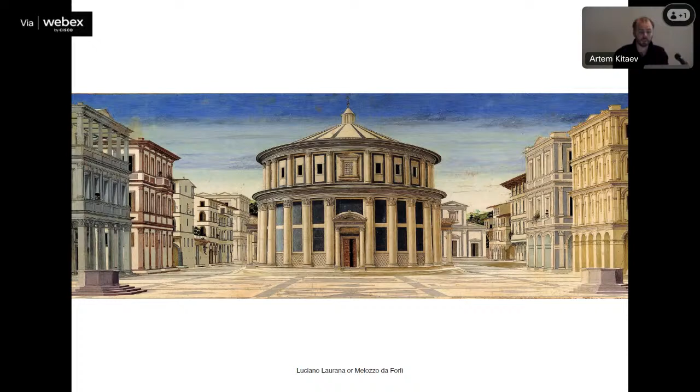Today's discussion, I would like to start with the image, our image of the future. This painting of an ideal city brings us, or reveals for us, understanding of the Renaissance understanding of an ideal city. So we could see here beautiful perspectives, square colonnades and windows carefully assembled in a beautiful ensemble. One beautiful project, and the only thing which we miss here is understanding of the place, or history of the place, what actually was here before, and it's difficult to trace the history of development, of achievement of such a beautiful ensemble.

Later in this engraving, offering us another vision of the future, we could see again an inspiring atmosphere of technology and architecture, where beautiful facades align in one ensemble. And again, we're lacking to detect the development of the site and what was here before, like it was installed at once as one project.

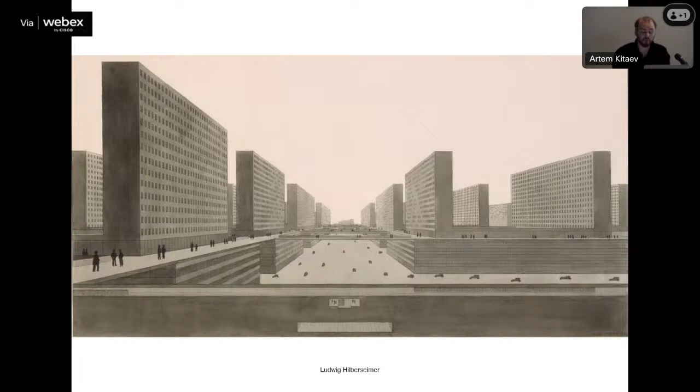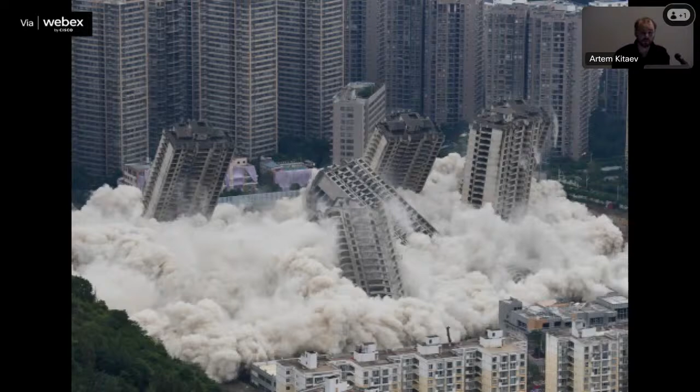Or the other project of the future, which also proposes strong control and a great understanding of these future plans, and what happens when such a project, such an idea, such a concept doesn't fulfill 100% of our requirements. We have only one, the most efficient solution to free up the space for the new bright future: demolition and new construction.

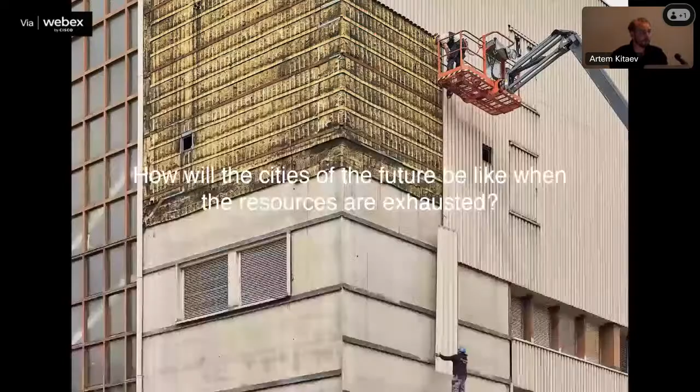So the current organization of the construction industry is extraction, construction, and demolition. Very linear, very efficient, up to a certain limit. But what do we do when all the resources are exhausted, or most of them are exhausted, or they're just not affordable anymore? What should be the role of the architect in such a configuration?

And here, probably, it's the moment when we can try to question the role of the architect, or imagine a transformation of the architect from chief builder to chief curator.

Architect: archi from the main, or chief, and tect, builder or constructor. So it's the person who creates spaces, designs and builds new spaces.

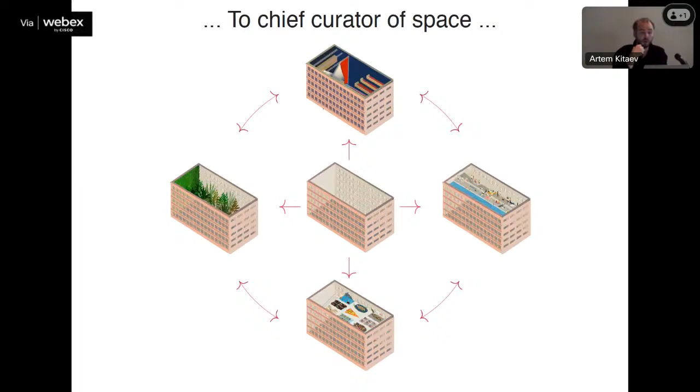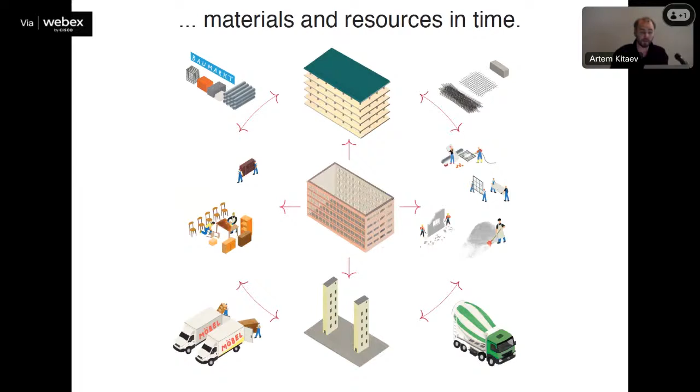But probably it's time to see our role more as a curator of spaces, to find the possibility to adapt existing spaces and structures to new needs and requirements, but not only spaces, as well as materials and resources. Any construction, any demolition is every time a great resource for new construction, and we are not allowed to waste these resources. The careful evaluation of the values of existing structures, of the values of the resources, of their potential in the cycle of construction is our absolute responsibility, something we don't have the right anymore to avoid, to skip, or to give to other occupations or experts.

Assembly should be looped, should be cycled with disassembly through reuse and repair. It should be one inevitable circle with a circular use of resources, where each action, each new facility continues the process of disassembly. So each old becomes new, and each new should bear in mind that at a certain moment it should become old and again be reused. So we have to implement these processes of future disassembly, and design for disassembly, in a way.

I would like to illustrate these thoughts with several projects. The first project which we have done, which I will show today, is called New Order. We did it for the Swiss Art and Design Awards in 2017. In this project we tried to work with materials which normally get unmentioned by architects, or even ignored by architects, but which would inevitably appear in architectural design and urban space. I'm speaking here about regulation cones, anti-bird spikes, different protections.

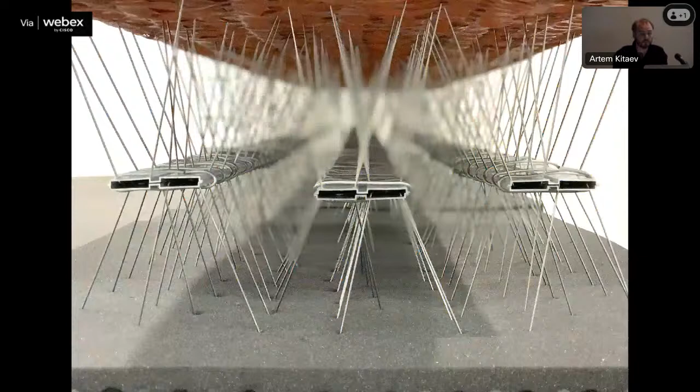To conceptualize it, these are materials and elements which protect buildings from people or animals, or protect people from being hurt by buildings and structures. We tried to see how we could work with this material unconventionally, to rethink the way they could be used — for example, to use non-structural materials as an element of the structure — trying to understand where the potential lies in using them in a very new or unexpected, or even probably wrong, way, but also trying to discover a beauty of sharp and soft, bright and gray.

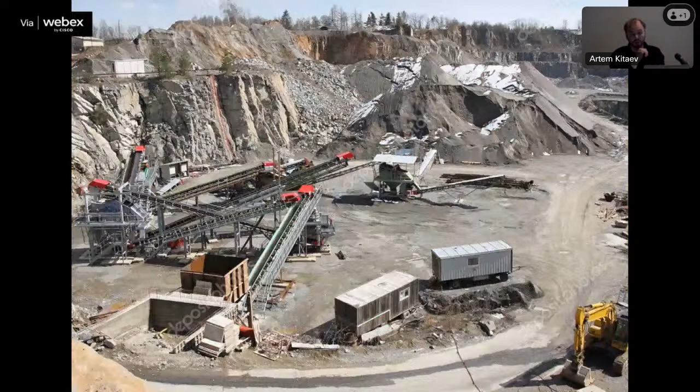The next project, called Permanently Temporary, was a competition for a pavilion in Barcelona, which we won together with the Parabase architectural office. This project is dedicated to materials excluded from the construction cycle. And again, any construction is based on the extraction of natural, unrenewable resources.

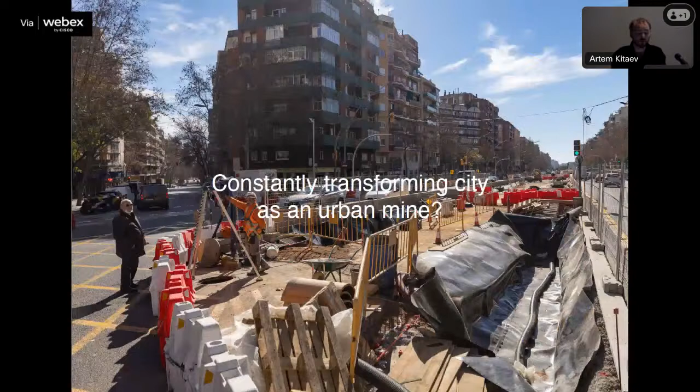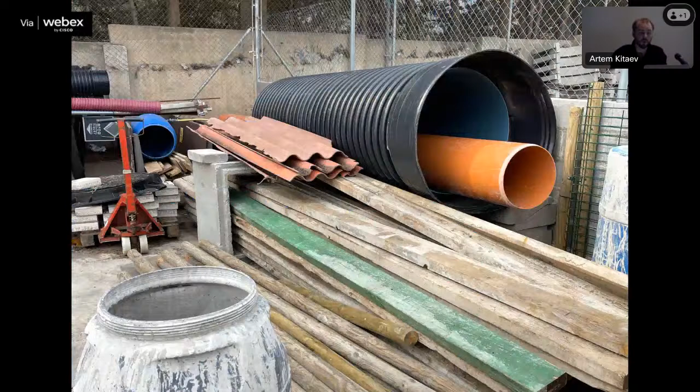And we thought, what if we look a bit closer at the materials which are already available to us? Any contemporary city constantly undergoes transformation, which releases a lot of spare materials that then just happen to be stored or left around the city, or placed temporarily, or awaiting dilapidation or decay. It was very interesting to us how some materials, which we don't even have a strategy to reuse, could be brought back into the cycle of construction and used for the creation of facilities.

Sometimes they get stuck behind the columns or stored under the sheds, and they are absolutely diverse in scale and geometry. We were granted access to different storages in Barcelona, where we could find pretty much everything, starting from heritage sculptures of particular beauty.

For example, here we could see doors of Sagrada Familia just stored somewhere in one of these garages in the outskirts, or elements of Enrique Miralles' Stadium just placed in the field behind the sports grounds.

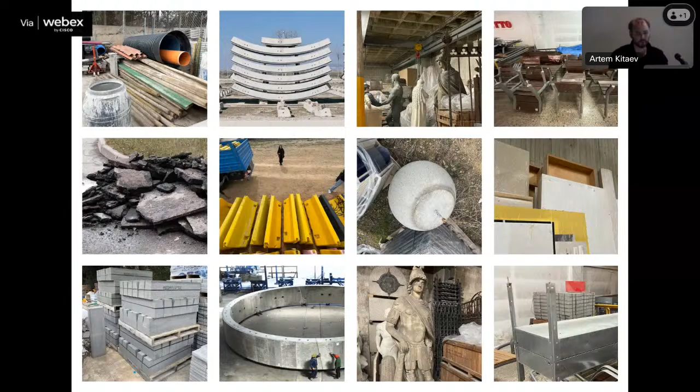And when we speak about reuse, it doesn't mean using everything you have. Reuse is not a patchwork of all accessible materials. Reuse is a careful selection and assembly of accessible, available materials in one composition.

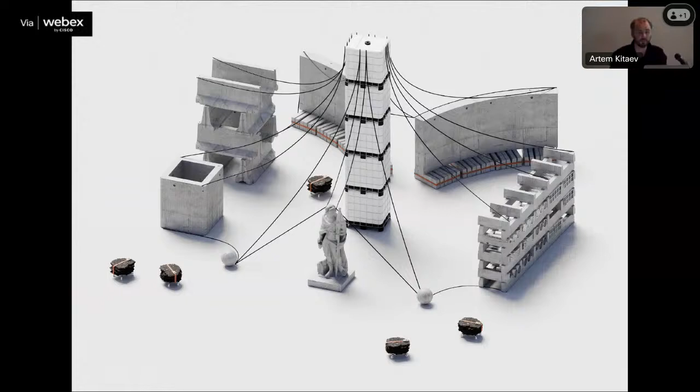So we decided to select mineral materials for the temporary installation, which normally are not used for this, carefully placed them on the side and covered them with debris netting to unite them in one form.

And that's how the pavilion opens - well, it's not doors, it's actually fixed tunnel elements - but it indicates the main entrance, which is supposed to invite visitors inside.

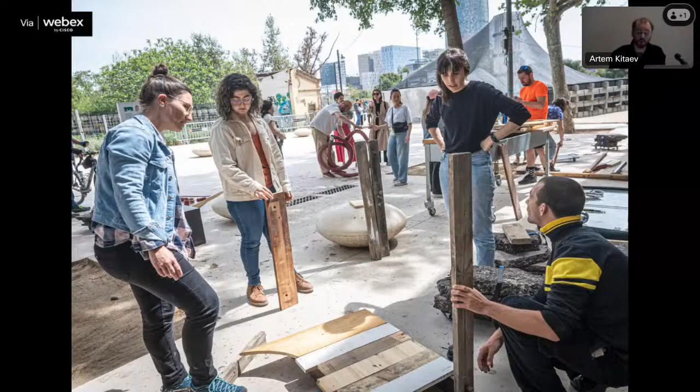And from the other side, we have invited the other main character of the pavilion. It was important to us to create a space which would allow a dialogue through exhibitions and different workshops about the meaning of materials in the contemporary organization of construction.

And we spoke not only about construction materials, but also about heritage. What is the role of heritage in construction? Is it just untouchable monuments, or could we see some of them as spolia, being again integrated into the cycle of construction and bringing us not only visual pleasure, but also probably some practical meaning to the structures?

So the pavilion happened to be quite an active public space over the day and in the evening and over the night for people, not only keeping twinkling company with Agbar Tower by Jean Nouvel.

And when we were building this pavilion, it was very important to us to pose the main question about the temporality of permanence - how temporary this pavilion should be, or how permanent a temporary pavilion should be.

And this combination of temporary and permanent in the pavilion, we also decided to unpack through the method of construction.

So we built this pavilion in such a way that we would be able to disassemble it without damaging any of the materials, because all the materials were rented and we had to pay a deposit, and we wanted to get this deposit back. So we were very careful about the materials.

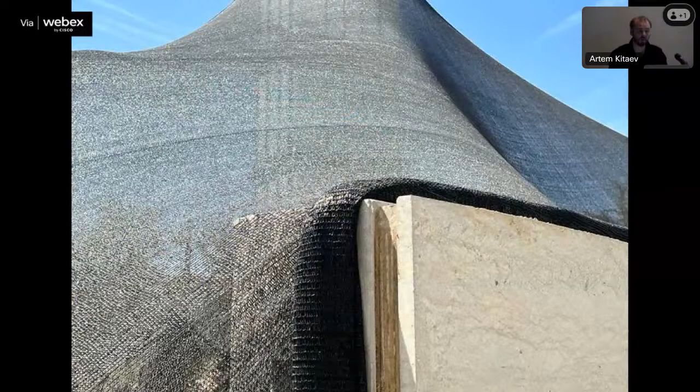For example, even the debris netting, we decided to roll - and by rolling the material, you reveal an additional quality of the material, so it becomes strong. And actually, we didn't use any straps. We just pulled the same fabric all around the stacked elements.

And we fixed all the other elements also in such a way that we would be able to disassemble them without damaging any of the materials.

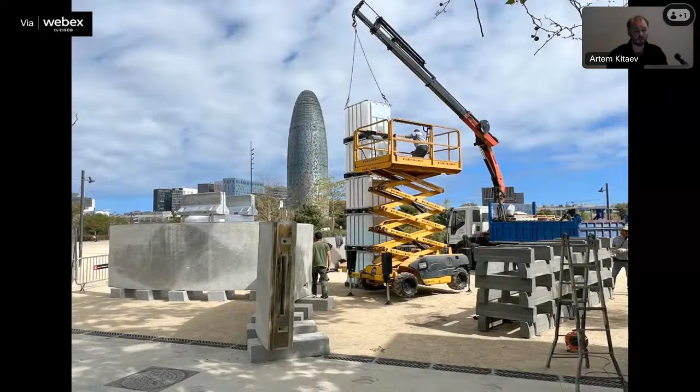And even the seats were made out of these concrete blocks, also in a way that we wouldn't be damaging the concrete blocks. And afterwards, the material was disassembled and returned to the storages, and we made all the materials available again for construction and further reuse.

The other project, of a different scale but dedicated to the same question, is called Stadthotel Triemli. It was a competition in Zurich to reuse 3 identical dormitory buildings, which we won.

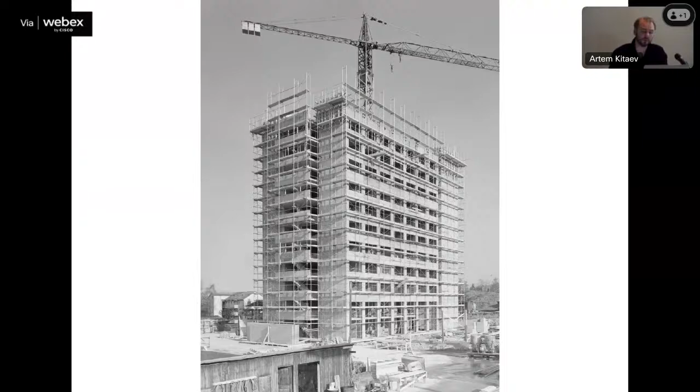So these 3 identical buildings were built in 1967. Back then, it used a quite progressive technology of prefabricated structural walls, which allowed the building to be assembled quite fast, but which also created rather efficient and rather dense cells within the building.

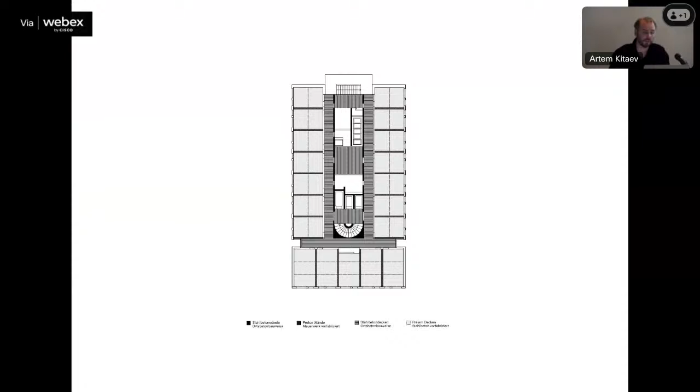But on the other hand, this type of organizational structure of the building didn't allow for easy adaptation or transformation. Interestingly, because of that, the City of Zurich decided to demolish the building, even though it was in perfectly good condition. You could see the perfect concrete and these enfilades of rooms - everything clear and ready to move in, but it didn't comply with current regulations.

To us it was interesting to showcase in these 3 identical buildings, different scenarios, what we can do with such existing structures to adapt them to new requirements. So we came up with a concept, hardware, software, and architecture, meaning to divide architecture, to design architecture for change, dividing it from the very beginning into 2 parts.

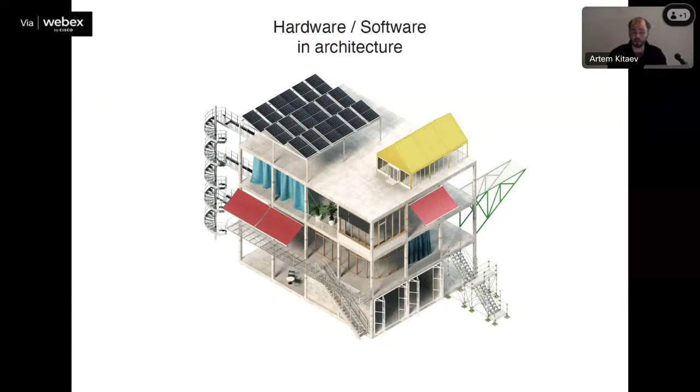Hardware is a flexible, open, load-bearing generally structure, and the software is this adjustable infill which allows us to adapt the structure to new programs and new requirements. So the first step we took was bringing this structure to a kind of universal open mode, which would allow the integration of different programs.

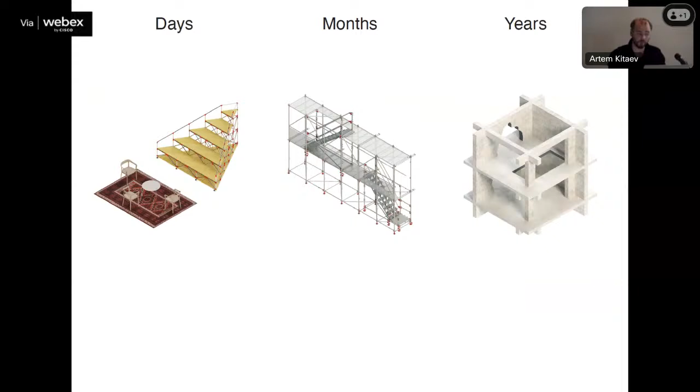Then we introduced 3 scenarios for each of the towers. The days, for example, for a short-term stay like hotels, where all adjustment would be done by furniture only. Months, it's like seasonal living or student accommodation, where different temporary structures could enhance the structure and provide additional amenities. And years, where we would intervene with the load-bearing structure itself, for long-term stay, for housing for example.

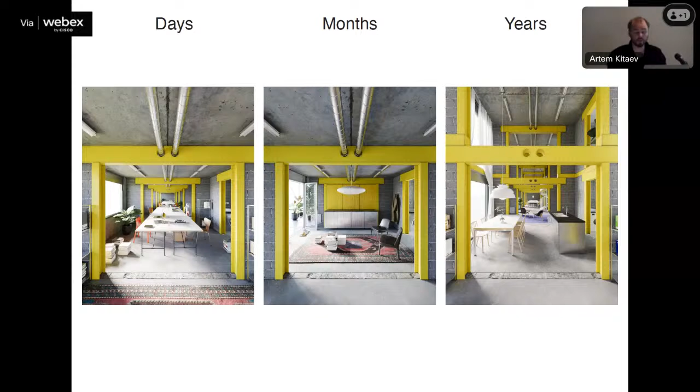So here you could see these 3 scenarios: furniture, temporary structures from the outside, and transformation of load-bearing structure. That's how these scenarios look. On the left, different layouts of furniture, new amenities on the outside for the month scenario delivered by the temporary structure, and years when we open up the existing load-bearing structure, enriching the diversity of spatial conditions.

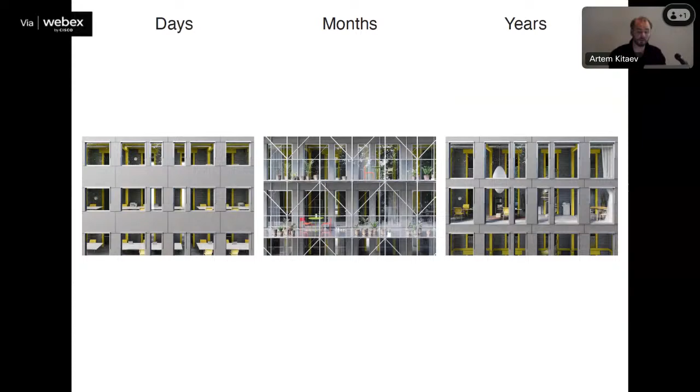And of course, all three types of interventions had their own difference and different expression on the facade. Here we could see three scenarios: years, months, and days, which offer three additional strategies to work with such structures across different extents of time.

Crevasse. It is the project, the competition for renovation of the Contemporary Art Museum in Geneva, which we have done together with Jan De Vylder and Inge Vinck Architects.

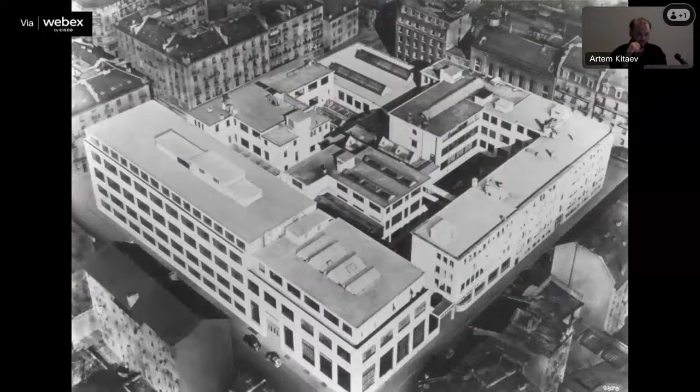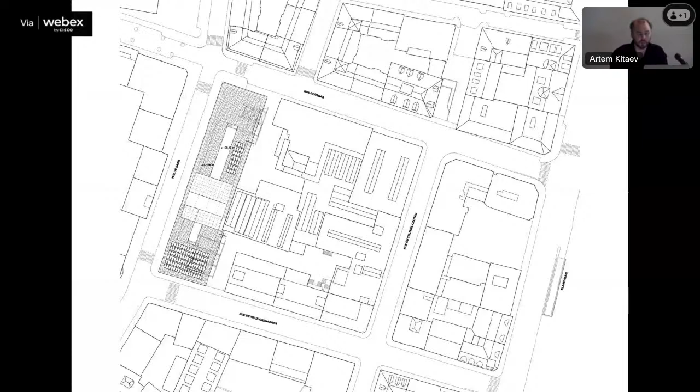This industrial building, built at the end of the 1920s, actually consists of two parts, built with a difference of 5 years, and it now hosts two institutions. The building occupies the western side of the city block, and that's how it looks now.

What's also interesting is that it has a back facade and a connection with the courtyard, which also could be, or has the potential to be, used as a public space.

What is interesting about these two institutions is they technically don't share much more in common than the building itself. More than that, they both lack an identity within this building. It's not even clear where the main entrance is or how to enter either institution. So that was one of the main challenges of the competition.

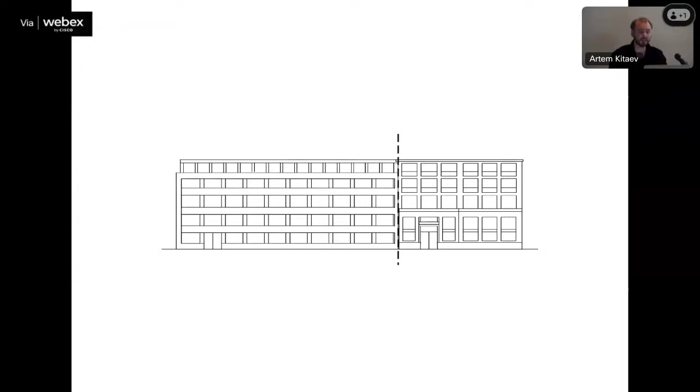To us it was interesting to find this joint, this place where we could reveal, or intervene in order to reveal, this identity. Sometimes improving a situation doesn't mean to build new, but means to extract.

Similar to the actions of Lucio Fontana, who released the energy of the canvas by cutting it, or the actions of Gordon Matta-Clark, who separated buildings, we proposed to introduce such a crevasse, a crack, which divides the glacier into parts.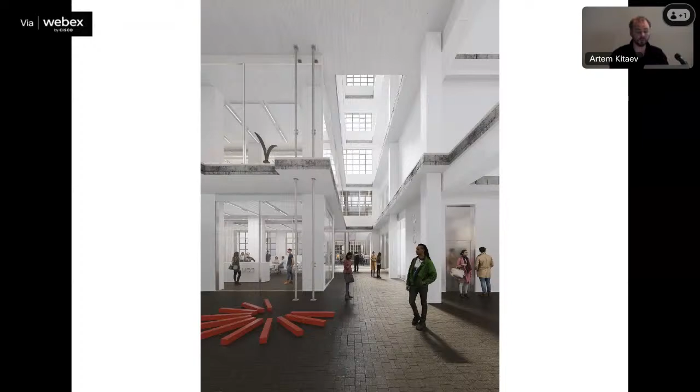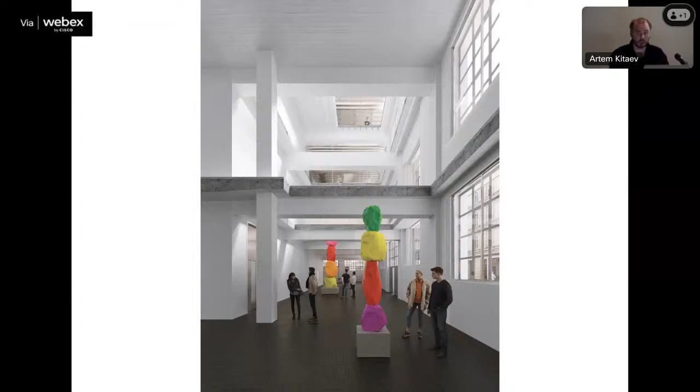So we decided to divide this building, to unite it by division. We introduced a big opening which separated the two institutions, but connects them, offering a visual connection and building up identity, as well as offering a space for interaction and communication, for exhibitions, and a connection to the backyard public space, enriching the spatial conditions of the space.

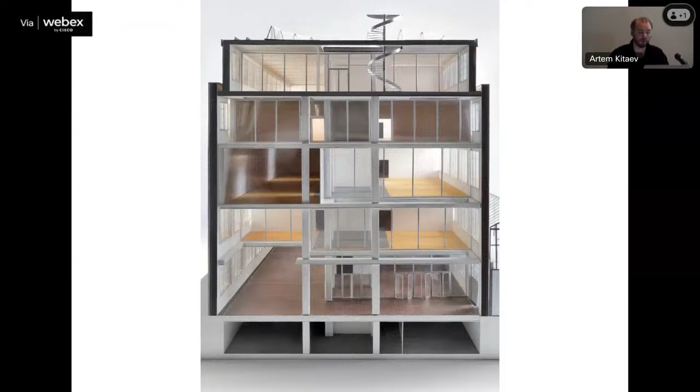So this combination of tall and narrow spaces has enriched the overall offer of spaces for the two institutions.

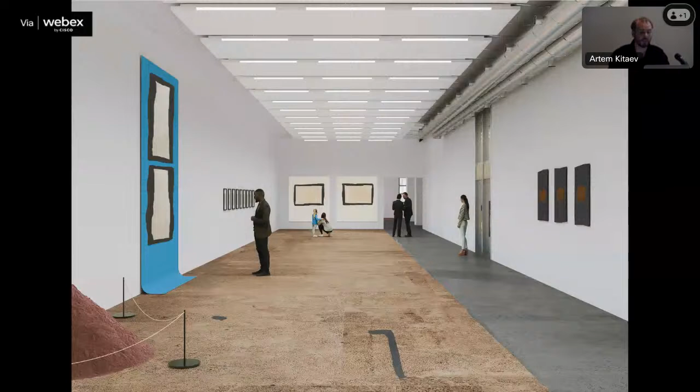To us it was interesting to see how in this simple structure we could find room to express this diversity, and we tried to preserve as much as possible of the existing structure. For example, here you could see even the floor, this industrial floor with different stains, is also supposed to be preserved in the white cube gallery.

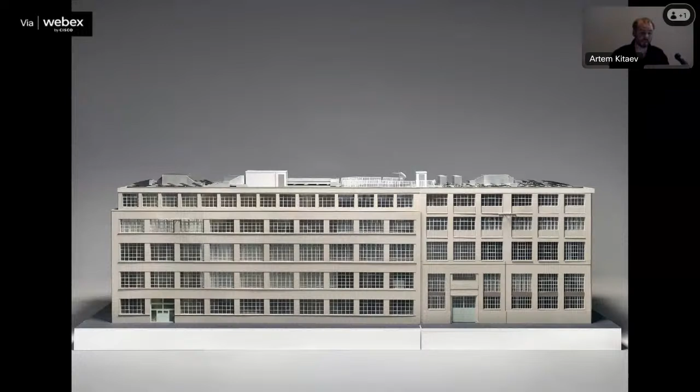That allowed us to build up a new identity for the two institutions within one building, by preserving the building as it is and revealing the beauty of this existing facade grid, with an external relationship to the outside.

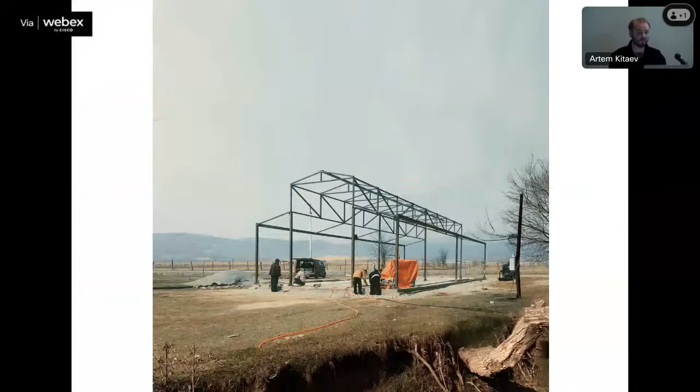Temple Barn is a transformation of an industrially produced shed into a community center. We were invited to help transform an already bought industrial shed into a community center by one community in the mountains of Georgia. It was interesting that we almost didn't have a budget to work with this project, and choice due to a lack of accessible materials was very limited.

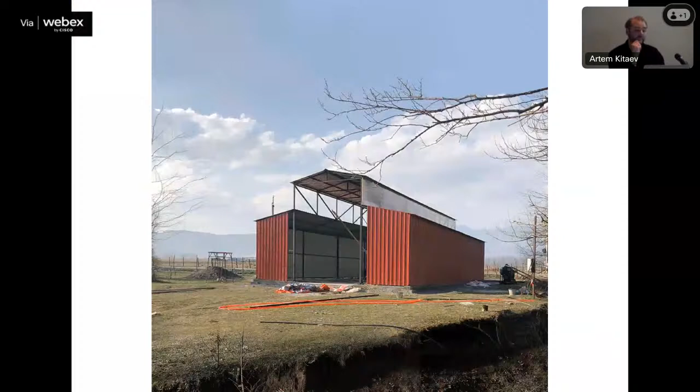They just asked us which color of corrugated metal we wanted, green or red. We said let it be red. And then we looked at this building and realized it's a basilica. So we decided to foster this comparison by the rose window in order to introduce the spatial drama and identity to the space, and then started to look further at basilicas.

It's very interesting because a basilica is actually a very efficient brick structure, decorated often only on one facade, covered by a very thin layer of marble in order to provide ornamentalization. So we thought, back then it was efficient technology with decoration. If we followed this logic of the basilica, we would also keep the contemporary technology of nowadays, which is an industrial shed covered with corrugated metal, and just find a way for ornamentalization, but in a very technological, contemporary way.

So that's what we did. We just thought, why not paint it? And we did. We proposed a recipe for how to paint this cathedral in order to transform the industrial shed into a basilica, which was quite surprisingly received by many people around.

Nevertheless, it was a very interesting project to bond the community. Similar to Tom Sawyer, who offered to paint the fence, we offered this community to paint these patterns on the facade, and by painting it, they actually gathered around.

When it was finished, it was indeed quite a surprising contrast with the context. But once it opened its doors, it immediately gathered the community around and became a very vivid and recognized space, offering a roof for different types of events, from workshops to grill parties, beautiful dinners, and more workshops.

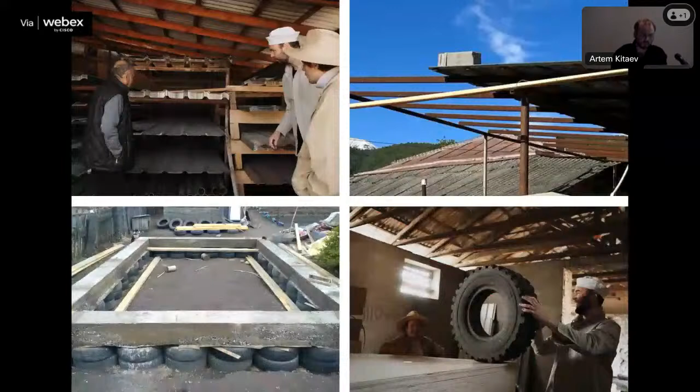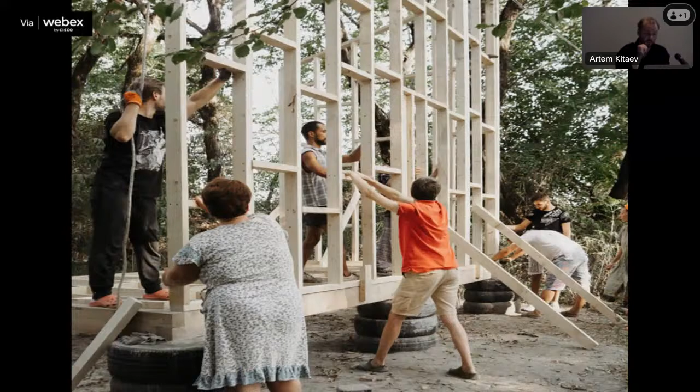It's a minimal living unit for the same community. Here we tried to understand how you could build a minimal living module using local, accessible construction techniques — for example, a foundation out of old tires, or a stone on the roof, which prevents the roof from being taken by the wind, making the structure cheaper and easier, and also using not very qualified construction workers to assemble such a structure.

And to land such a module in the surroundings of the forest, in order to reflect the light and attract everyone who needs a home or shelter.

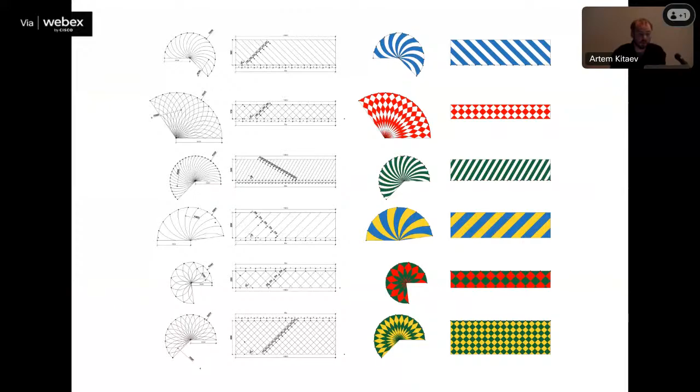In the other project, we try to understand how minimal living at all could be. Do we every time need to build a house, or sometimes for a community like this, could we refer to the traveling circus identity, like a chapiteau, and offer just circus tents which could organize or transform a field into some kind of settlement?

Highlighting the identity of each of the members through this kind of colorful background, and also identifying the relationship of nature and human again by light and color — rather minimal means, I'd have to say.

Sometimes we also try to react to climatical challenges. Like in this project, Urban Rain in Basel, we tried to understand how we have to deal with constant heat in cities that are overall paved. I believe you've experienced enough in Berlin last summer what happens when the temperature goes above 30.

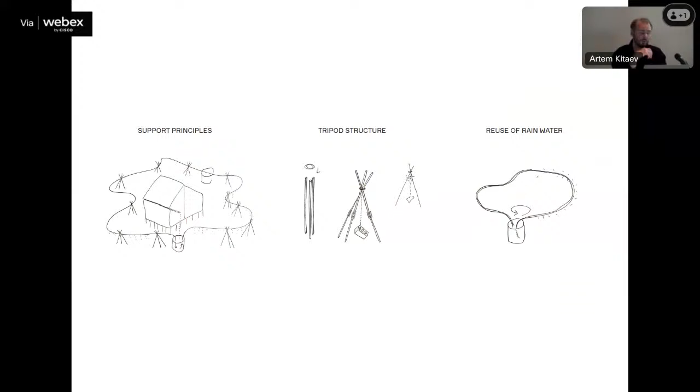In Graz, for example, they use fire trucks for this, but apparently fire trucks have a different meaning and are probably not the most rational solution. So it was interesting for us to see how we could build a temporary installation which could be assembled and disassembled in a rather fast way, also using minimal means.

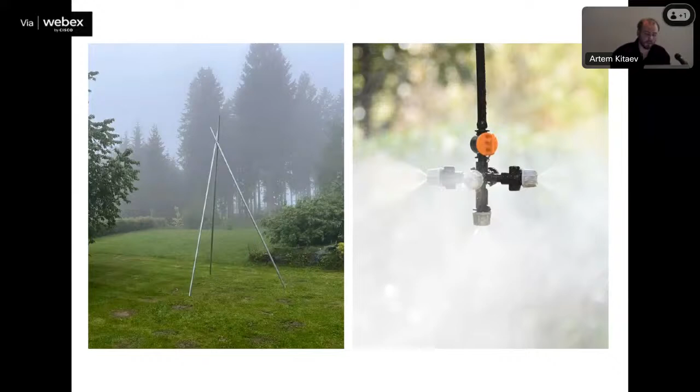We used only industrially produced materials — actually we just went to Obi and tried to find everything there. We assembled a series of tripods which would carry the industrial watering system, transforming this lawn into a playground, offering refreshment and drops of water to overheated citizens.

As you could see, it works very simply. But what was very important to us is that it allows two things: on one hand, to water the ground, and on the other hand, to provide more water in the air. So by cooling the air, we use the same water to cool the ground.

Then the same water was evaporating from the ground, really changing the microclimate over there. It's good to state now that it's disassembled, but it was a really significant difference in the installation and nearby. It became quite a vivid public space over the day and in the evening and night. Villa Volatile is another example where we tried, with minimal means, to create protection from sun

or probably from rain, and also mark the significance of the space by introducing light. It was quite windy, so the light was constantly shaking, so we had to find a big stone to put between the lights, which provided more weight and stabilized the light.

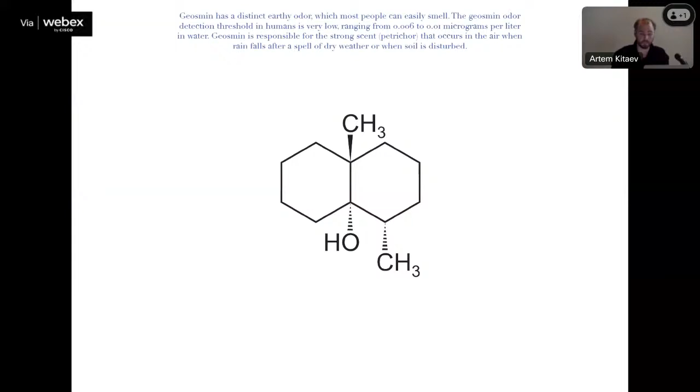So we decided to work with the smell of fresh, after-rain water. We worked with an artist called Tansky, who developed this type of smell, called rainforest after the rain. It's a special type of molecule which appears when dry ground gets wet after rain, and that's why it's so recognizable.

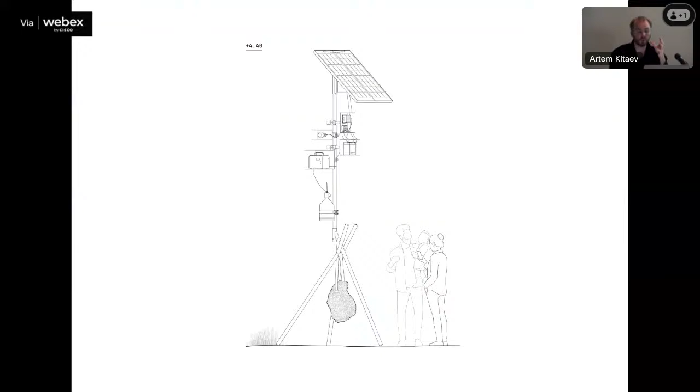To us it was interesting to introduce this smell and see how it could be spread around through an architectural installation—which of course should also be solar panel driven. We installed it as tripods, as certain stelae, which would organize the park around it, providing this dystopian context with the feeling of a fresh rainy day.

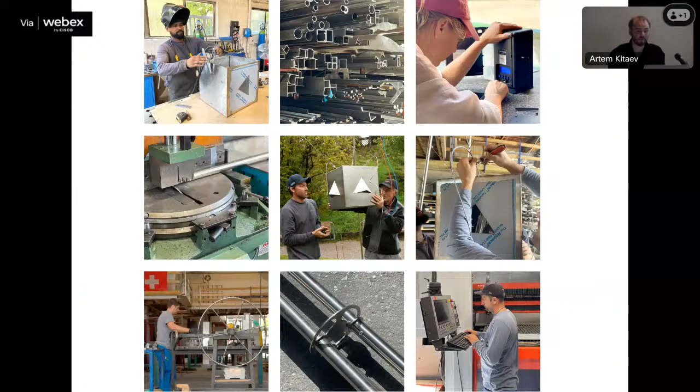We decided to test this concept at the Biennale of Design in Zurich, where we installed one of these prototypes, to see how this box could change the perception of the surrounding through smell.

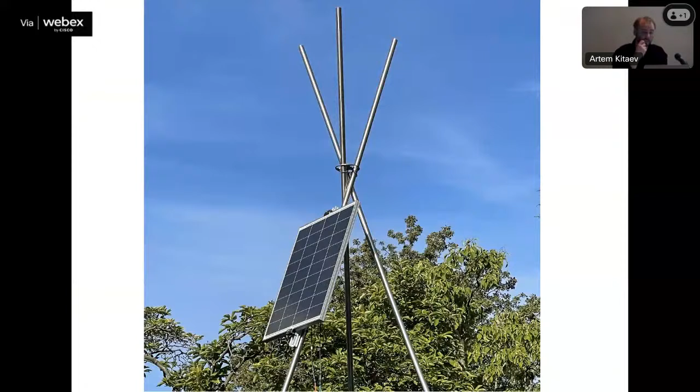It changed our understanding of the context and possible future. And of course, it was very important to us to assemble this installation in such a way that we would be able to disassemble it without damaging the material.

Digital Totem was a set designed for a fashion show—the first fashion show after COVID. After all of us had been sitting for a year and a half in front of screens, we finally went live. It was very important to understand what screens or digital technologies mean now, and the relationship between digital and real.

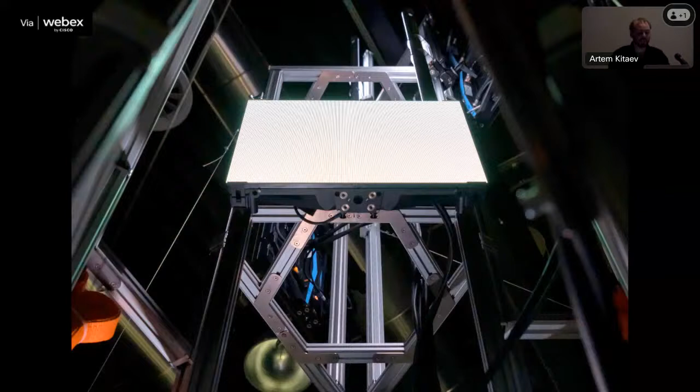So we decided to speculate about it by installing this digital totem, to understand what digital technologies could mean in the real world, and what the analog world means on the screen. That's the setting where the fashion show took place. Again, the screen was a symbol of this totem—the new god, the new connector with reality.

So it was a rather critical project which questioned what is actually real, what is the meaning of digital in the real world, or how real the digital world is, when sometimes something that happens distantly is much more important and present for us than things which happen right in front of our eyes. Therefore, to us, it was important to nail it to the ground, to the nature, to bring it with some basic manual solutions to connect, or let's say to fix this installation.

As we see, not everyone is inspired by the installation, and also by the screens like this model, which walks away. Despite the meaning of the events which were announced over there, to us it was also interesting how, with such a combination of screens, we could give different meaning to all of them, activating them all at the same time, or letting them fade away.

And since we're in the walls of university, I would like also to share several teaching projects which we do in different universities. I will start with a project which was driven by the industry of tourism.

Mass tourism and cruise liners bring not only many happy people for one day to overdriven-by-tourism European capitals, but they also generate a lot of liners for reuse. We know in the last Biennale in Venice, there were many works dedicated to this topic, but generally the other side of this tourism industry is where many of these tankers and boats have to be somehow reused, disassembled, and we know that many of them are disassembled in places under conditions which would never be allowed in the conditions under which we all would like to work.

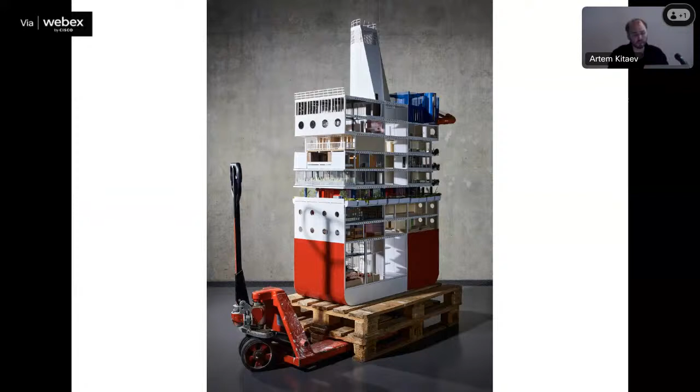So we dedicated this project to the war crisis and refugees who fled from Ukraine, and there was also, and still is, a shortage of housing. So we thought how, for example, this type of vessel could serve the purpose of housing people. We proposed to look at this as a structure which could still house people, and introduced several scenarios for how we could integrate housing of different types, seeing the existing structure not as something to disassemble and throw away, but as a valuable resource to actually satisfy current needs.

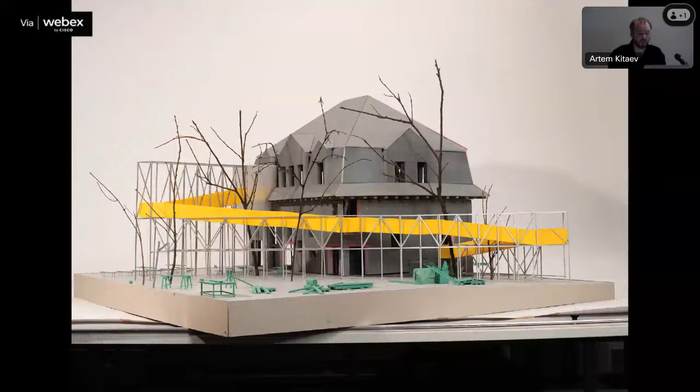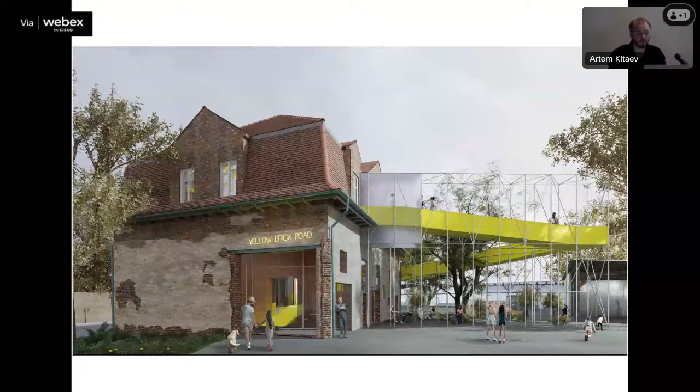The other series of projects is from TU Vienna, from the studio dedicated to transformation, also called Hardware Software in Architecture, which here we call a transformation of learning, or learning transformations. So how could we transform an ugly house into an active public center by introducing new scenarios of use, by revealing the potential diversity of different spaces with different atmospheres and environments, also activating the spaces around it to integrate it in the context and in the use of the house, to allow the house to celebrate new life and new visitors.

Or how a banal tower could be transformed into a contemporary building, which again would offer diversity of uses for different social groups and remain a landmark in the context of the city.

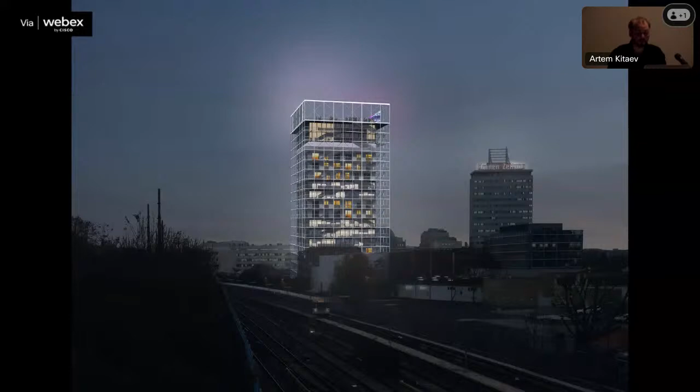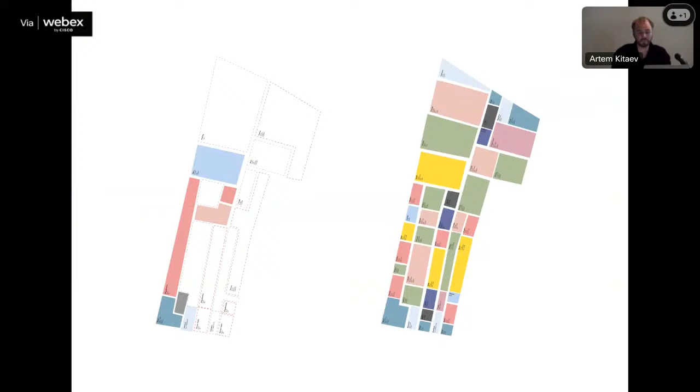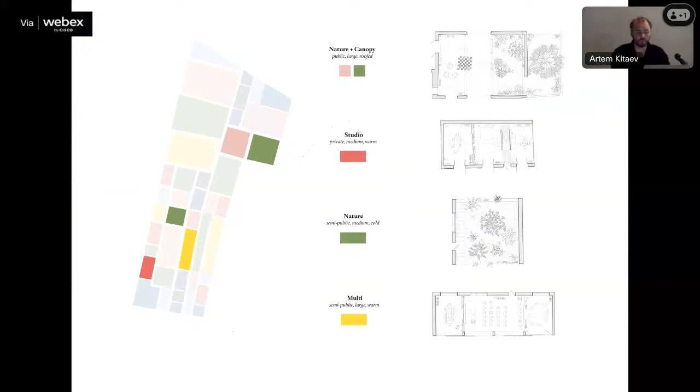Or how could we intensify the use of the area, like this suburban project with a mono-use of the land? We could transform it into a diverse matrix of spaces and functions, offering diversity of uses and spatial conditions and environments, trying to understand what kind of functions could fit in different types of spaces and how they could be transformed and interchangeable depending on differences of use, offering new perspectives for this type of use and setting different connections between different functions.

Again, revealing the potential of spaces in between, and in-between conditions, which could be seen not as buffer spaces, but as actively used spaces which allow us to enrich the use and intensity of any space.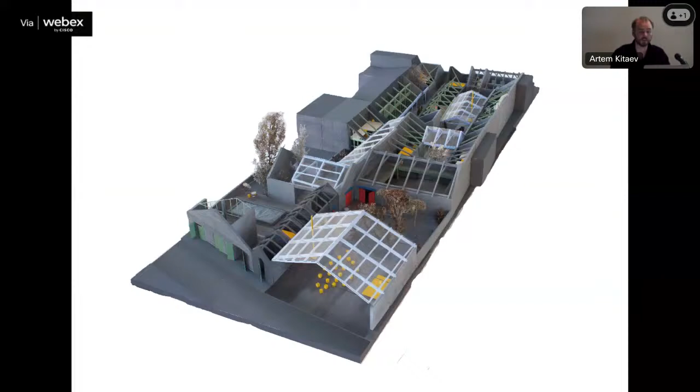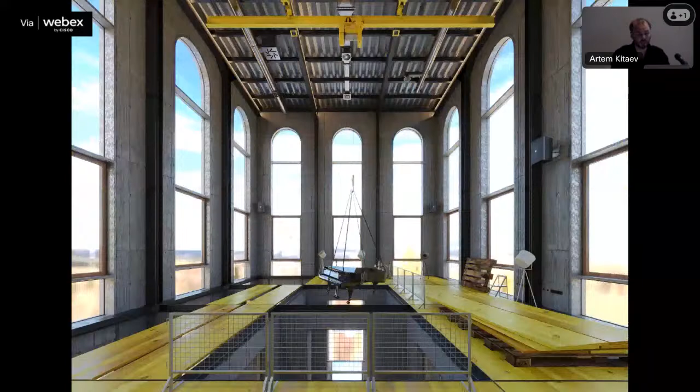Or how could a silo tower be used and changed for other purposes, for civic purposes, for example? This transformation of the tower could allow us to integrate different uses of different types and scales, while still keeping it open for future transformation and adjustment. So it was very important for us here to see the structure not as a complete project, but as something that could be constantly developed further and changed.

I would finish this presentation with two other projects which we have done. So in the project of Airbox Sports Center, we wanted to bring the drive of suburbs into the surrounding of Central Park.

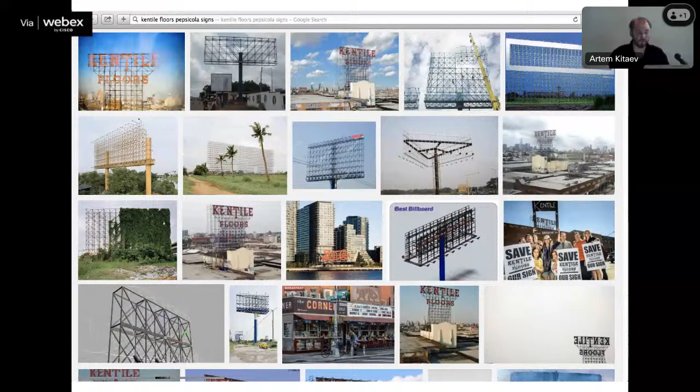So we looked at the suburbs and the symbol of suburbs, which is the billboard, and it was very interesting to recognize the meaning of billboard as actually a very efficient structure, a minimal representation of maximum information. It's the absolute economical minimum to explain, to deliver, to promote maximum information. So it was interesting to us to transform the building into this kind of open frame structure, but also transform the building into infrastructure, which could offer different types of uses and orient itself differently to different sides of the site.

So this open frame structure activated each side of the site. Here we could see the main entrance and this kind of billboard that indicates the main entrance. We could see how greenery grows through this kind of lounge side, organizing facilities for seating and shade. Shadow generally played a very important role in this project.

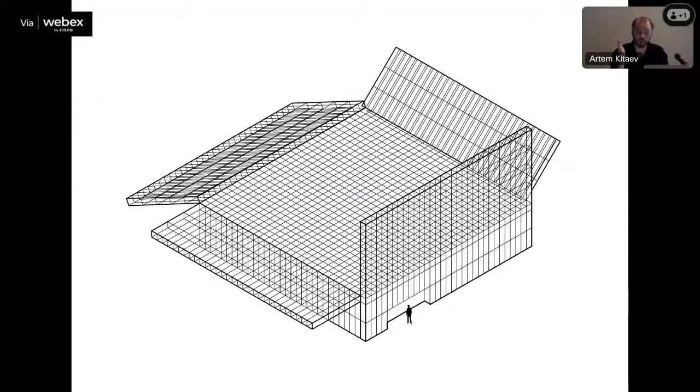It was very interesting to see how present the shadow could be. And sometimes when we discussed this project and blurring the borders between indoor and outdoor, it was interesting to discuss where actually the border or presence of the building begins. Is it the heated volume, the glass facade, or is it the structure, the open structure, or is it, for example, the red pavement, or is it the shadow?

That was on the other side of the building. We organized the sport facilities, and one of the important principles of the building was the so-called naked building. So it was very important to us to introduce, to reveal, to make visually accessible these areas of the building which normally get hidden from external view. I'm speaking about technical rooms which are revealed on the main facade, and the storage of sport equipment also revealed. Transparency and connection with the outside was a very important quality.

So the inside also connected with the outside, and the park, for example, gets inside the building. And the only permanent color-wise element of the building was the utility core, which remained the same during all seasons of the year, despite what we cannot say about the other parts of the building, which were changing according to the different seasons of the year, different lighting conditions from the inside as well as from the outside.

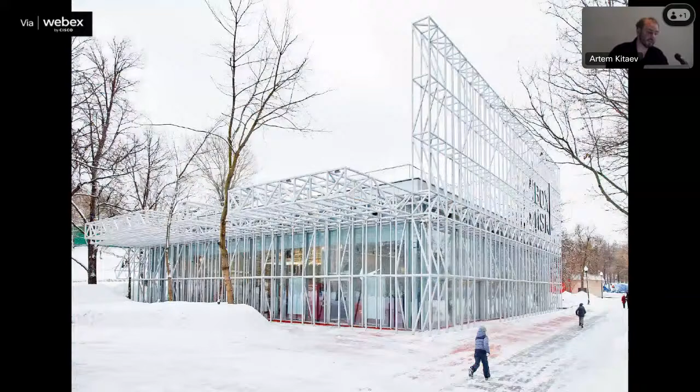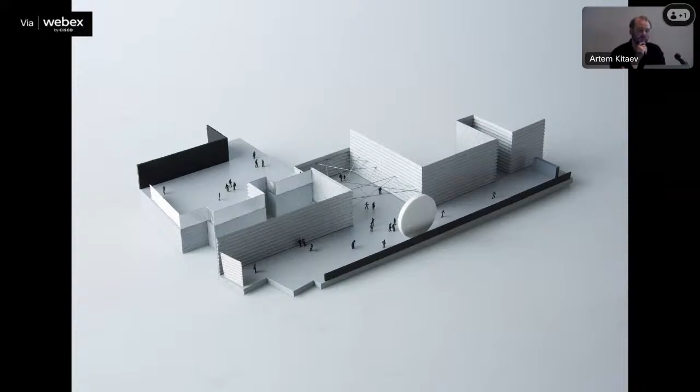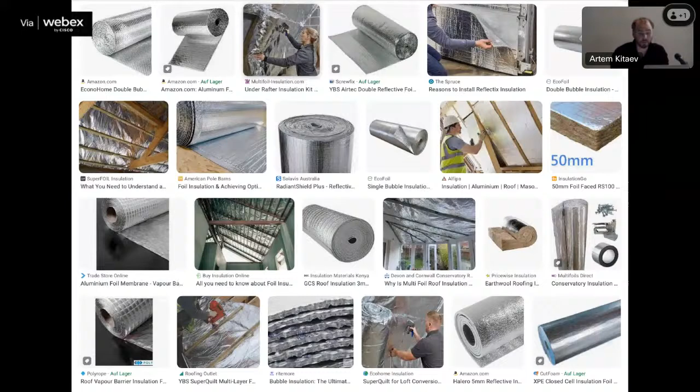Arma is the transformation of an industrial area into a cultural cluster, and here it was important to us to create an abstract but bright and memorable background, which could serve as a good environment for events of different types, like academic lectures or wild rave parties. Due to limitation of budget, we decided to work only with the surface of the facade. So we proposed to use unconventional material to create an unconventional appearance of the facade, and we proposed this detail in order to create a bit of an absurd environment.

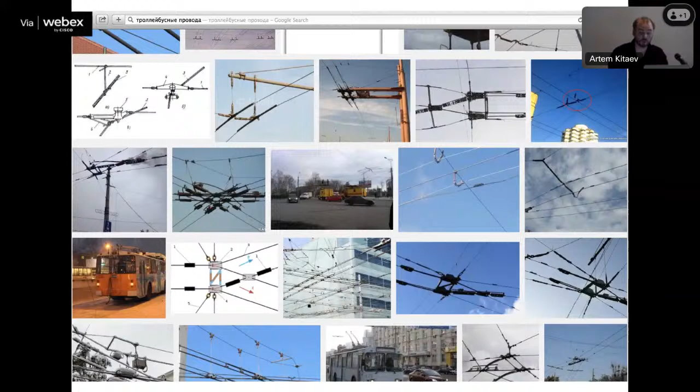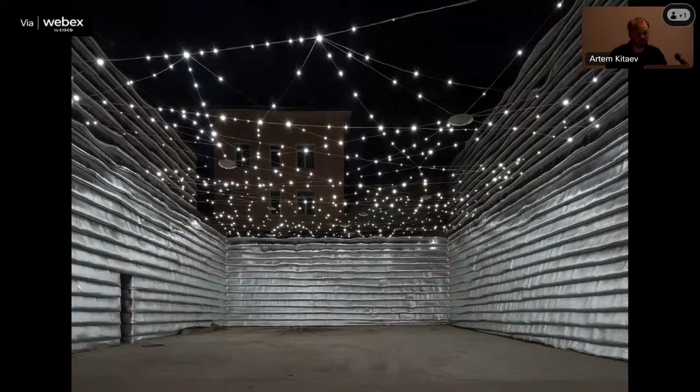A strange combination of set design and decoration reminiscent of dystopian movies. Another important element, a source of inspiration to us, was trolley cables. We got inspiration there and decided to introduce a suspended net, which would actually change the perception of the site, allowing us to transform this outdoor space into a more indoor atmosphere, a more dimensional atmosphere. So we introduced lights and loudspeakers over there, as well as mirrors to make it more shiny.

One of the most prominent elements was this white disc. Apart from its visual aesthetic role, it also played a very important functional role to obstruct the building behind it and help complete, to enclose this atmosphere of the space. It was also used as a media screen and became a place of gathering, one of the most central elements due to its abstractness and symbolic meaning.

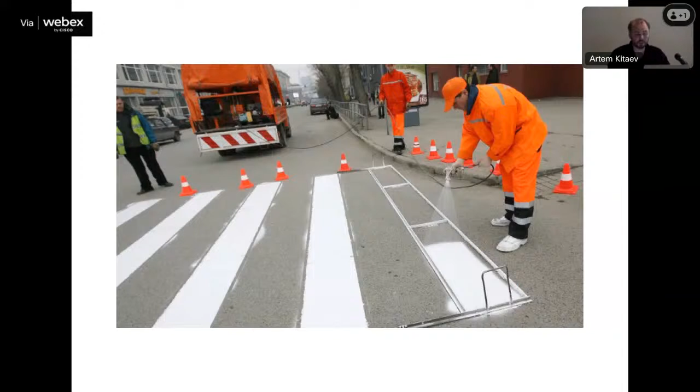And also, of course, scale played an important role. So this nine-meter diameter disc, we decided to color with a paint which is normally used for road construction, and this special paint allowed us to transform it into a really abstract surface, which was attracting all the phone cameras.

Thousands of images were taken of this disc, which helped transform this space into an alternative, magical place. But the most important part was the visitors, who received rescue blankets at the entry to the space. By carrying these blankets, visitors transformed from observers into actors within the space, creating the atmosphere and design themselves just by moving through it.

Thank you very much.